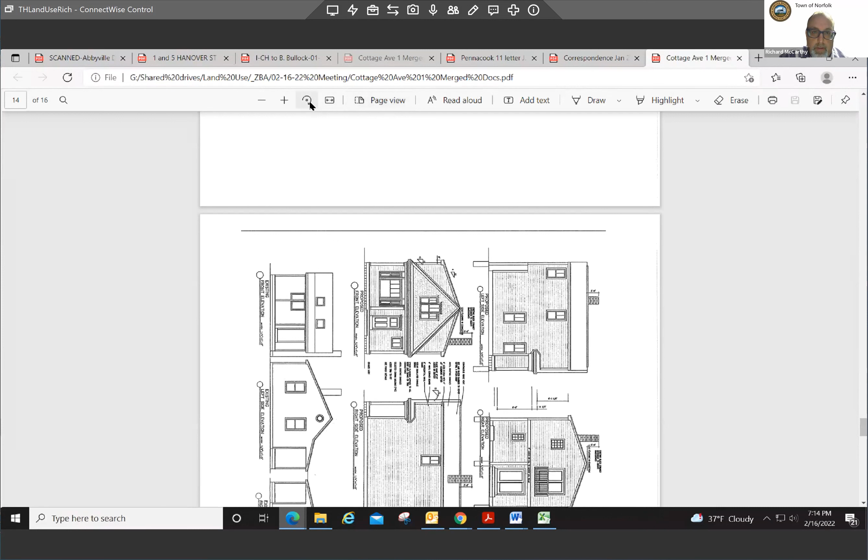So if you want to, Michael, just explain what the request is. Michael, if you could walk us through your application, that would be wonderful. Are you asking me? Yes. I was looking to put, it's a single bedroom cottage. I wanted to put a second floor on to put two bedrooms up so my kids, my family, can possibly come stay with me for a weekend or something of that matter. Make it just a little bit bigger, not much more altering what is there except for going up, I guess.

I have my builder here if you have any questions for the builder. That's gonna kind of make it more, I guess, a comfortable house, it's pretty small right now. If you look at the dimensions, it's pretty small. But that's what I'm looking to accomplish, is get a second bedroom so the kids can come visit and possibly stay for the weekend, something like that. I'm not moving anybody else in or anything like that, it's gonna be just me and the cat.

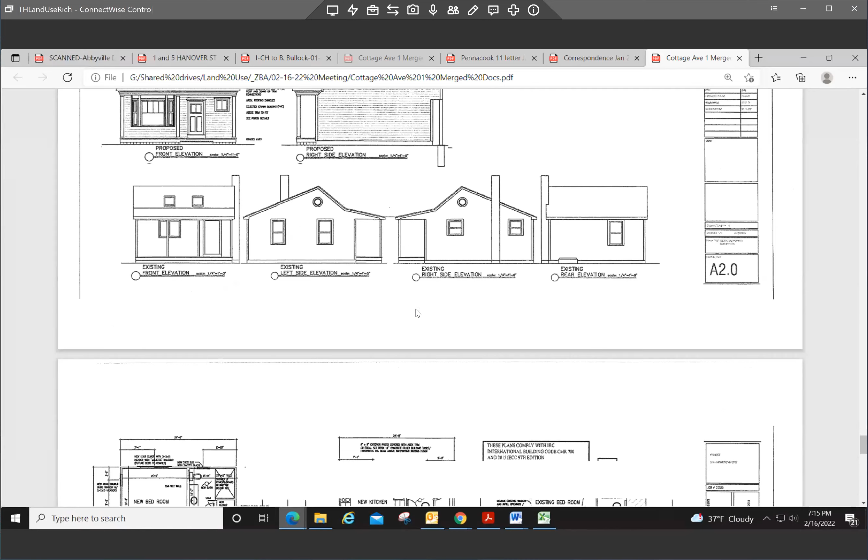It's difficult to hear. So Michael, if you could just help us out, I had difficulty hearing you. Could you just explain the property now? I think it's a small single-family home, and I think you said you want to expand by going up, I just couldn't hear you. I apologize, yes, I'll just talk slowly, maybe I talk too fast.

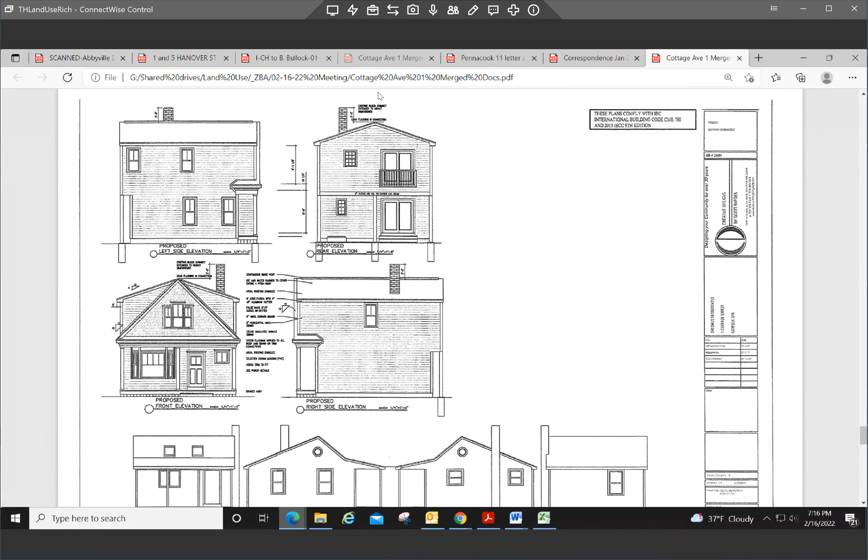It is a one-bedroom, living room, galley kitchen, bathroom house, cottage. It's a small cottage. What I'm looking to do is put a second floor, so a second bedroom, so my children can come over and stay if they want to visit.

So in terms of it's a pre-existing non-conforming structure, he's adding a second story to it, so he needs to come before us for an extension in terms of that as a non-conforming structure to add the second story.

Right, can I ask, Mr. Chairman, go ahead. Joe, second floor addition for another bedroom and any other room? That's a question to the applicant. One bedroom, two bedrooms? There'll be, the bedroom on the first floor will be non-existent anymore, and upstairs will be two bedrooms.

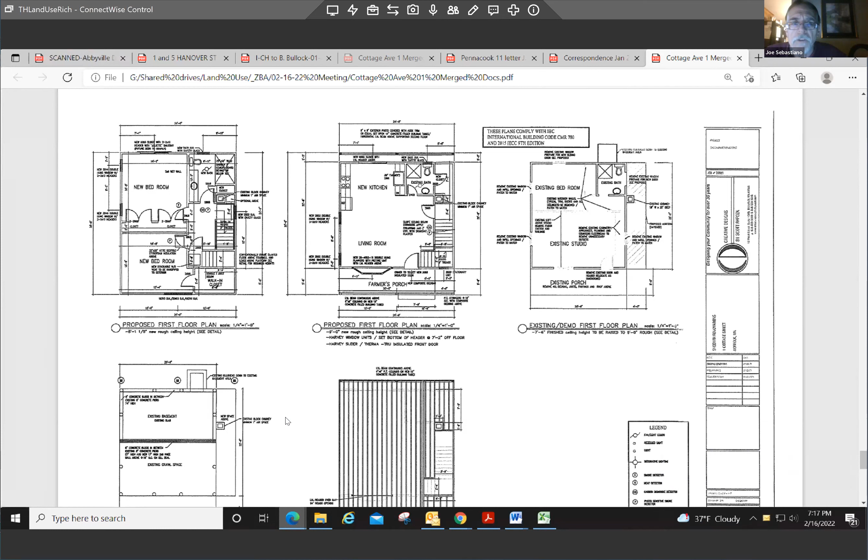Any other additional washroom or anything, or just that? There's a bathroom, right Joe? Yes, there is a bathroom, there's gonna be a bathroom on the second floor. Besides that, there's no more going on besides what I have now. All right, that was my question, Mr. Chairman. Okay, thank you. The Cottage Ave, I know generally where it is in town, but I don't know that I've actually been on Cottage Ave.

Michael, could you help me out a little bit? I know that area a little bit, not as well as I should, but I know some of the streets are paper streets down there. What I'm trying to get at - you kind of go through either Franklin or Medway to get there. Yeah, it overlooks Populatic. It's way up on the top of the hillside. I can see the lake, but I'm on the other side of the street.

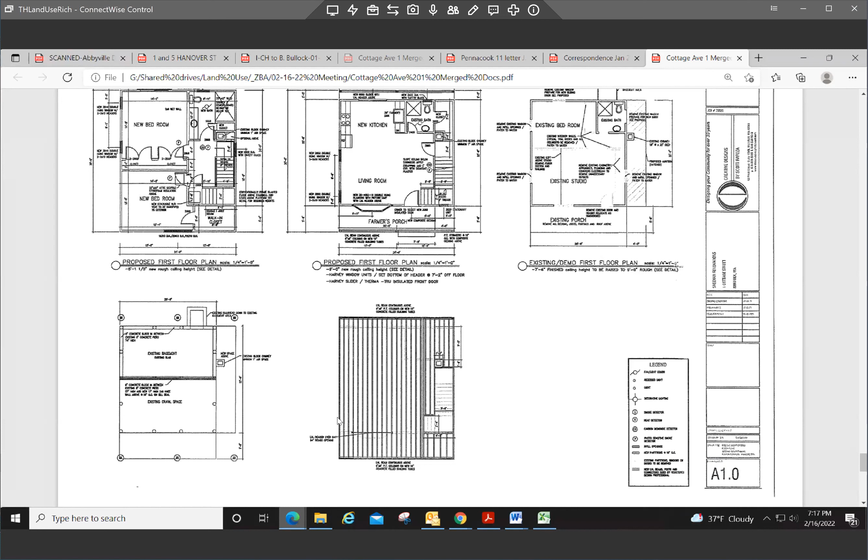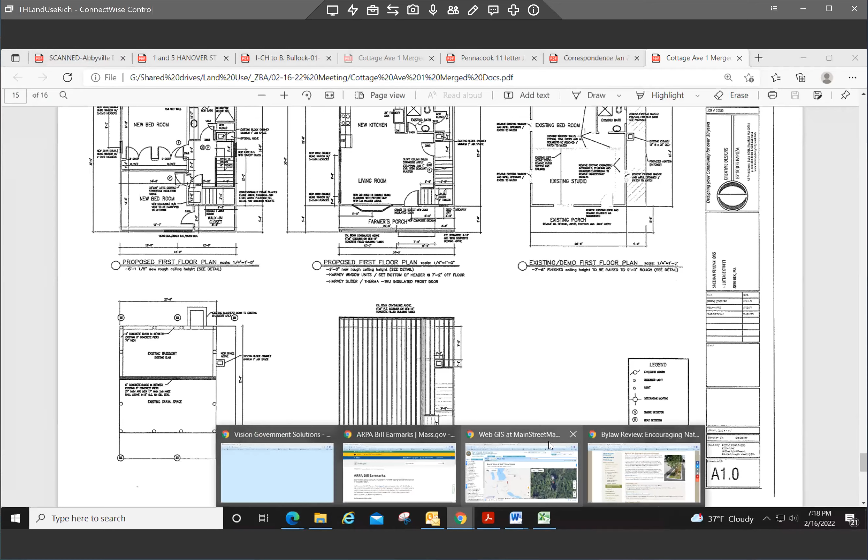Where else had you references? I usually go up by the Norfolk Airport, look around, and head up Leland Street when Leland goes around, and I almost do a U-turn and show up down the dirt road. It looks like - this is Chris Metcalf - it's not far from Old Populatic, which we know about near the lake. It's the higher ground of that, I guess you could say. So I think Rich has helped us with a map or a plan here, showing - maybe we can get a little.

So I should be - if I can read this - like 4-14-25. So is that Norfolk Ave? Is that, Norfolk Ave is the paper road next to me. Okay, so your access is off Cottage Ave. My access, that's my address is considered 1 Cottage Ave, but the paper road is there. So you're basically, from a practical purpose, at a dead end of a way. Yes, because Norfolk Ave does not exist. It's not paved. There's no cut, there's no way to get there. They built other houses. It's just a piece of gravel.

The reason I asked the question - we had, like Chris mentioned, one on Old Populatic, and this may have similar challenges, which I want to avoid relative to emergency vehicle access or neighbors getting out. Maybe your contractor might be available tonight to talk about how this would be done, if all materials and trucks would be located on your property so as not to block any egress or access points on Cottage Ave or any of the other ways.

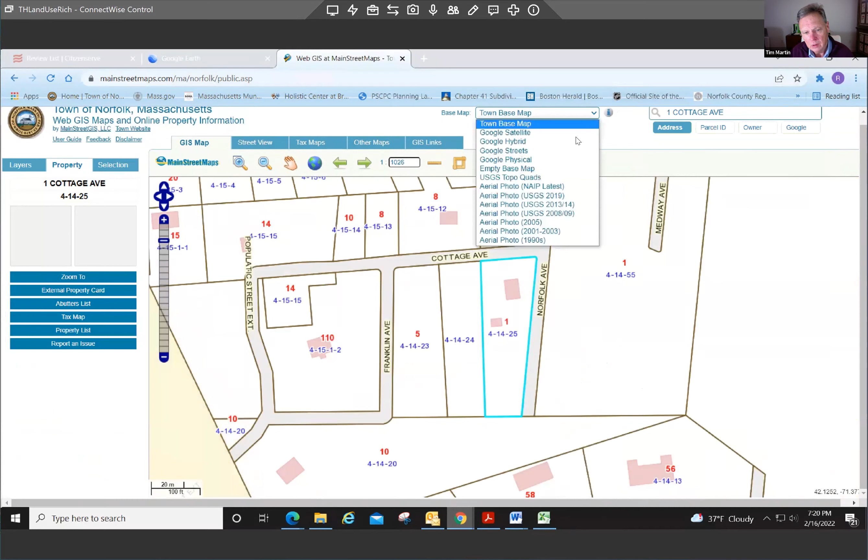It may make sense just because of the uniqueness of that area that, whether the board wants to do this, we may want to, like we did on Old Populatic, as a condition - if we vote favorably - have the applicant contact the town planner's office, or the building department, prior to construction, just so they know work's going on out there or ready to commence in a day or two, in case there is a concern. We tend to be in snow season, even in March and April some years, so it could get tight out there if work were to commence.

I'm very friendly with all my neighbors. I'm sure we all work together - any issues like that, we help each other plow out and all that. I'll make very sure that nobody's in the way.

This is Chris Metcalf. I have one question for Mike. One of the things is, in cases, it's not detrimental to the neighborhood, and I agree with him. But are any of the other houses 2-story, or are they all cottages in that area? No, there are actually - my neighbor across the street, that's 2-story. The Devon's at the end of the road is a 2-story. Actually everyone is a 2-story. I'm the only one that's not.

All right, good question. So it sounds like it'll fit in nice with the neighborhood. Yeah, and I want to make it look better. Again, it just gives me a little bit more for my kids to come enjoy if they choose to.

Great, any other questions from the board? I have a quick question, please. I understand it's an extension of a nonconformity, but what exactly is a nonconformity? It's the setback on the left hand side, right? From two front yards?

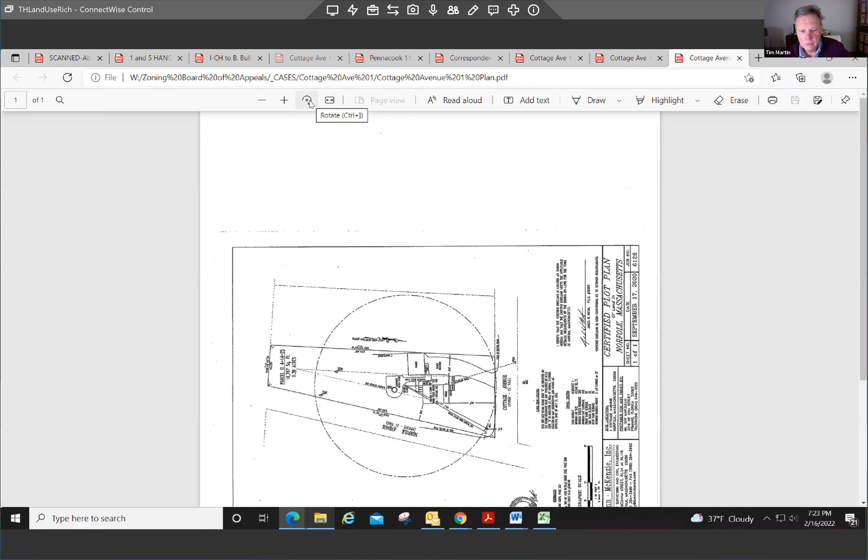I'm just gonna pull up the plan. Mike, I have one other question. In that area, are you guys on Franklin water and sewer, or on Norfolk? Nope, I have a brand new well and septic. So I'm not on any town system of any kind.

Okay, has the additional capacity been put in - do you have capacity for a 2-bedroom? Yeah, the well is way over on everything. No, not the well, your septic system. The septic systems are sized by bedroom?

And so that's outside our purview, but Board of Health, we might as well find out. I believe it is. That'll come up when you go to pull a permit from the building department. Yeah, that'll come up at that time, but you may want to check in. Yeah, you want to find out earlier rather than later.

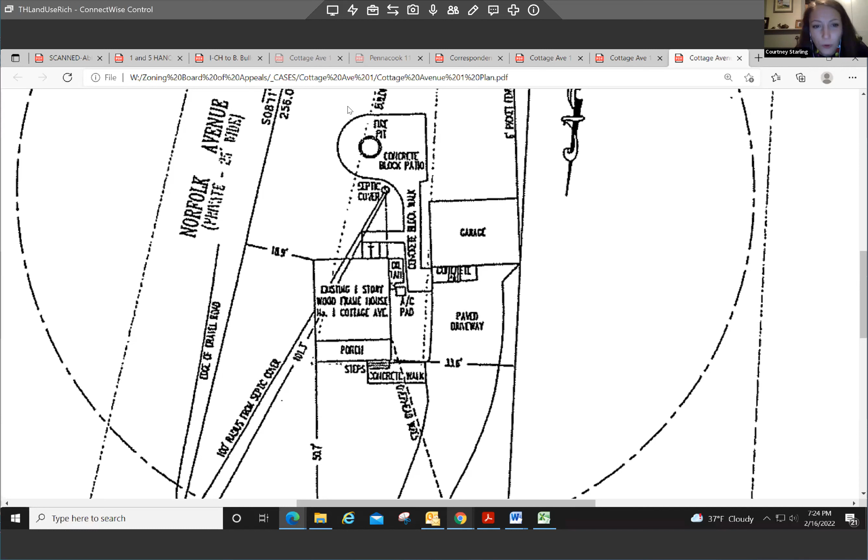So, I can't quite read the number, but I know it's less than 25 feet on the side there. I see 18.5. Okay, and the other one I can't - well, I wish my eyes were better. That looks like the garage is on the property line. Yeah, the garage, the side setback looks like 33 and a half. Yeah, I see 33.5. And then 50.7 on the front.

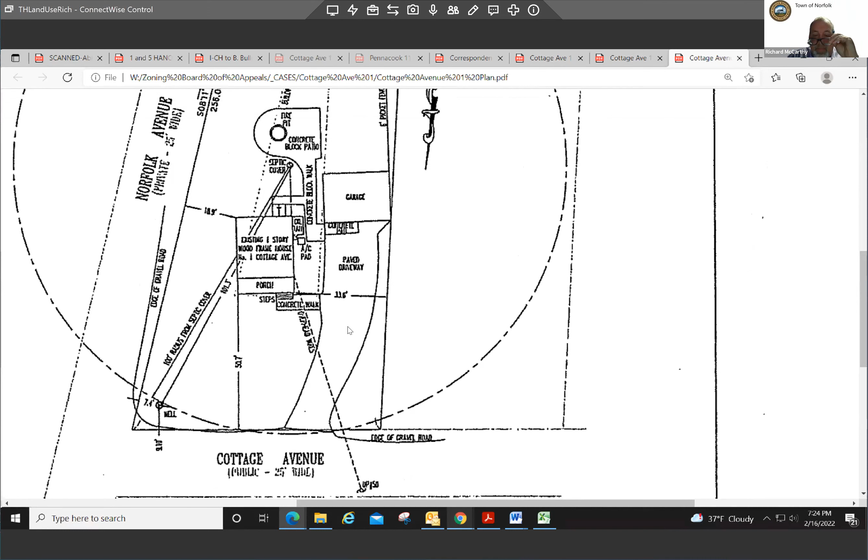Excuse my head, yeah - what's the actual lot size? Hold on... 16,767 square feet. So it's less in terms of overall lot size and the side yard setback. Yeah, I mean, in reality that's probably why it's nonconforming, is all of the above.

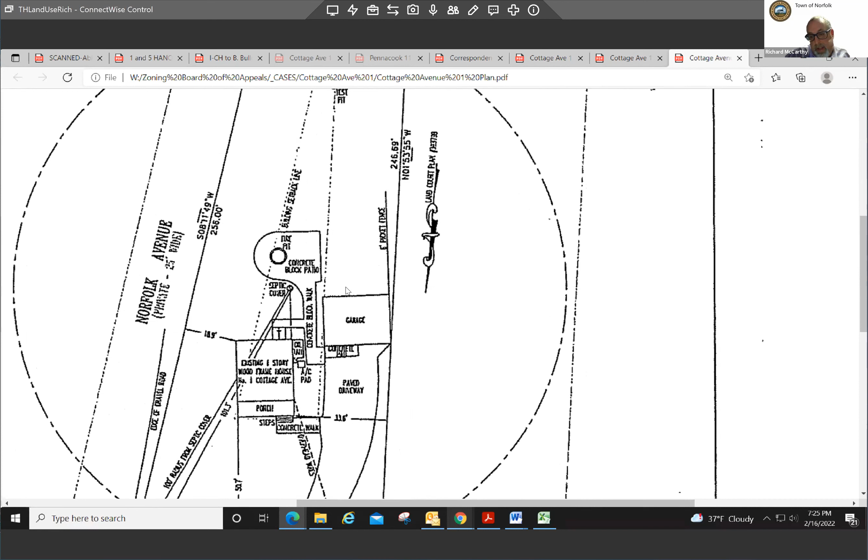Yep. And Rich, this is Joe - do you have all the dimensions you need for documenting the nonconformity? Yeah, no, I have the dimensions, I just can't - I apologize, my poor eyesight - be able to read it, that's all.

Yeah, sometimes it's summarized on the application what the setbacks need to be and what they are. You know what, let me double check - if I don't have it, I can get them though. I'm looking at the application I have a copy of, but I don't have that exact plot plan. I have the drawings of the additional room though, the additional floor.

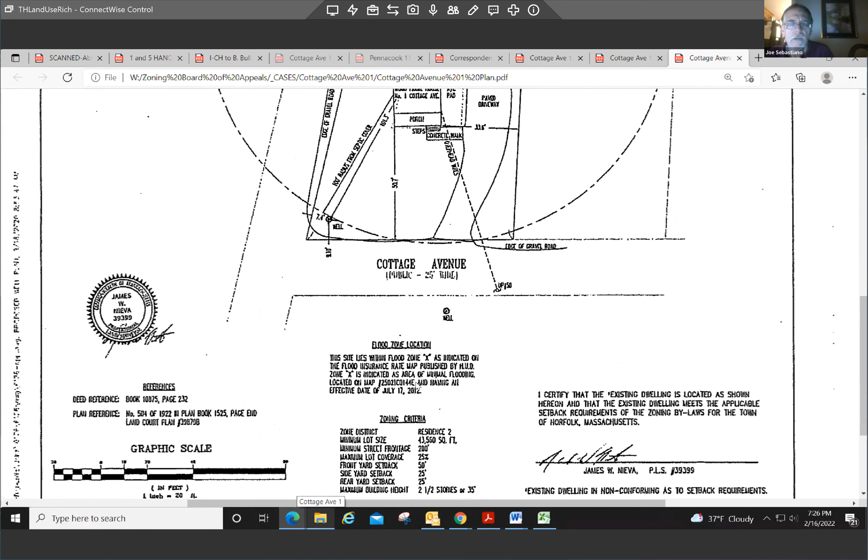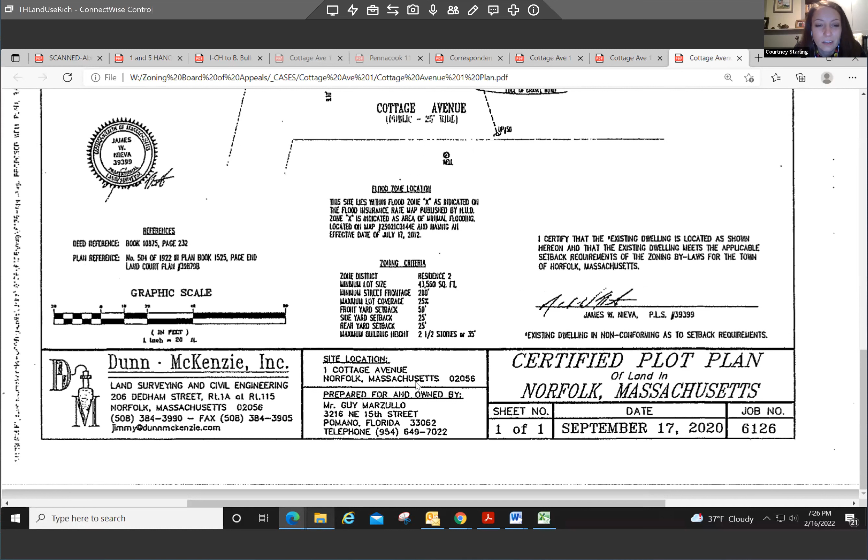Oh, there's the zoning analysis. Oh, but it's only what's required, not the existing. If I can get a better plan from Dunn McKenzie, I also could ask them to clarify. We can pretty clearly see the minimum lot size is deficient and the side yard setback marked 18.5 is the deficiency.

That's not - my eyes aren't that bad. My name is Joe Durb, I'm the contractor. We had Dunn McKenzie draw the plans for the project.

So they've got full-size plans - we have full-size plans we could submit to you guys. Yeah, oh sure, yeah definitely. The scan's just a little hard to see.

And I've walked the plan through the building department already, and pretty much around the town just to get a feel of everything, if it was worth trying to go for, and they said they didn't think it was going to be a problem, kind of thing.

So Joe, you'd be comfortable if there was a condition on the special permit that you reach out to the town prior to starting construction, just because of the uniqueness of that area? Yeah, no, I'll be honest with you, I do a lot of work in Newton, so I know how to play the game and keep everybody happy.

We send letters out to abutting neighbors just to make sure everybody's got our numbers. That's great, I just want to avoid any issues with emergency vehicle access or anybody else needing access.

Like Mike said, there's a paper road on the side. When you go to his property, it just looks like his yard, there's nothing there. So the lot looks small, but it's really not.

So you think without bothering anybody on the street, there's room for supplies and trucks on the property during construction, other than delivery coming in and out? I'll be honest, the picture doesn't do it justice. If you go up there and see, there's plenty of room, and it won't impede any of the other neighbors.

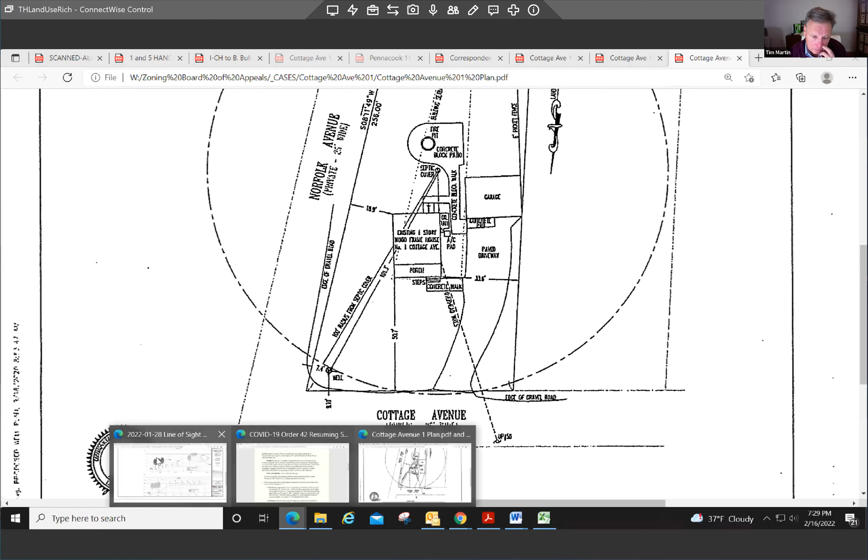And the applicant is very amenable if we put a condition on the special permit that they would reach out to the town planner and/or the building department prior to construction, just to have a construction meeting for access issues. It's really not as difficult a site as Old Populatic, I don't believe, but it's probably still a tight site, just trying to keep everybody having access out there.

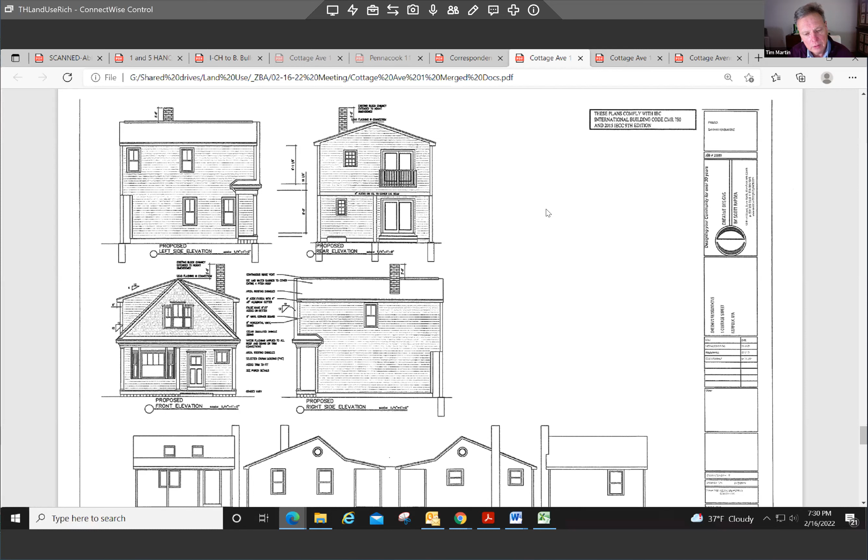That's all. And I did want to ask, I was here for most of it, just missed the last few minutes. I did want to ask, how much access does he have for parking, the applicant?

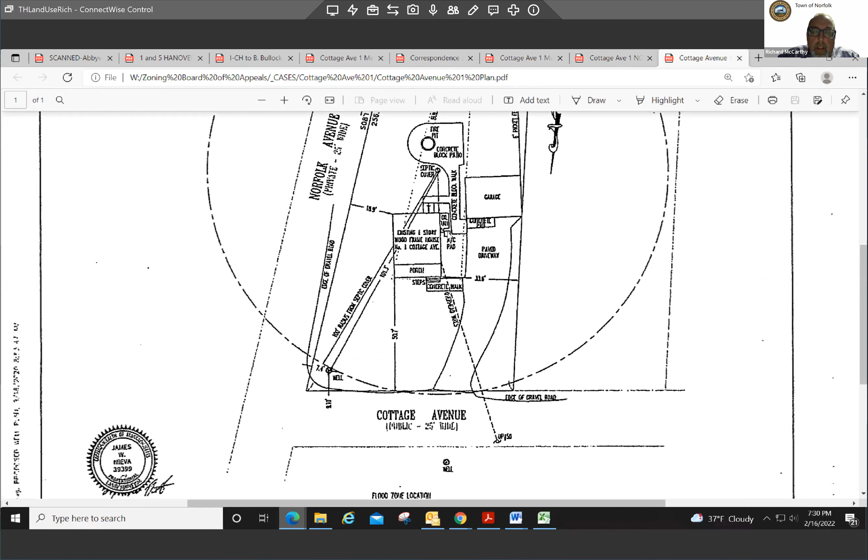Well, if you want to pull up that site plan, we can take a look at that. I think, well, maybe Mike could go through it. I can, just let me go there. Why don't we look at this? This will help a little bit, Josephine.

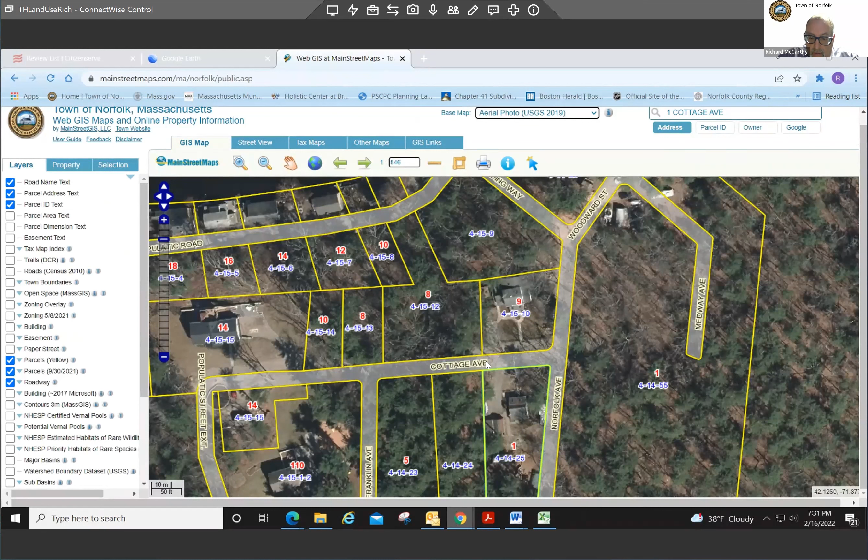So what's highlighted in green is One Cottage Ave. And then over here to the right-hand side of the screen, Norfolk Ave is a paper street, so it doesn't exist in terms of on the ground. The neighbor across the street - so what they're saying is that there's room on the ground, which I can't zoom in too far, but you can see there's room to be able to park construction vehicles and keep the driveway on the other side and this driveway clear.

Okay, yeah. And I guess I remember the applicant saying that they're going to look into whether their septic can handle another bedroom. I'm not sure they confirmed that, but that would be part of the building permit process. Dunfelt McKenzie will be involved in that. Oh yes, I'm familiar with them. So it's just one more bedroom you're adding, sir? Yeah, okay.

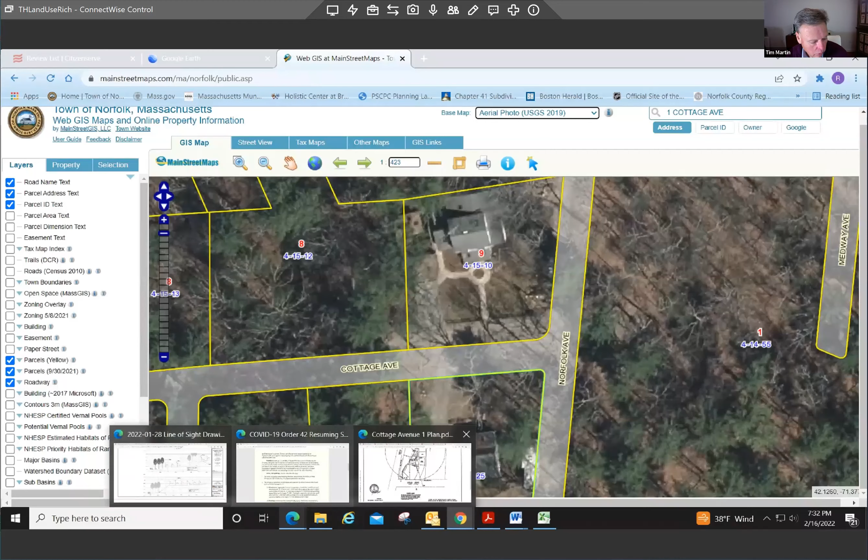Any other questions from the board? Is there anybody else from the board? Anybody from the public, Elaine or Rich? Anybody out there? I'm not seeing anyone.

Anything else from the applicant or the builder? No, I think we're all set. We'll do whatever you guys want. If you want, we'll send in a letter saying that we will contact the building department before any big steps are made as we go along.

That may be on the special permit, so I'd probably anticipate that. You're welcome to watch the meeting and we'll close. I intend to close the hearing if no one else has anything. And if we can tonight, we'll take the time, we'll deliberate and vote, and then have a decision maybe at the next meeting or earlier. We'll see how that plays out. Thank you very much.

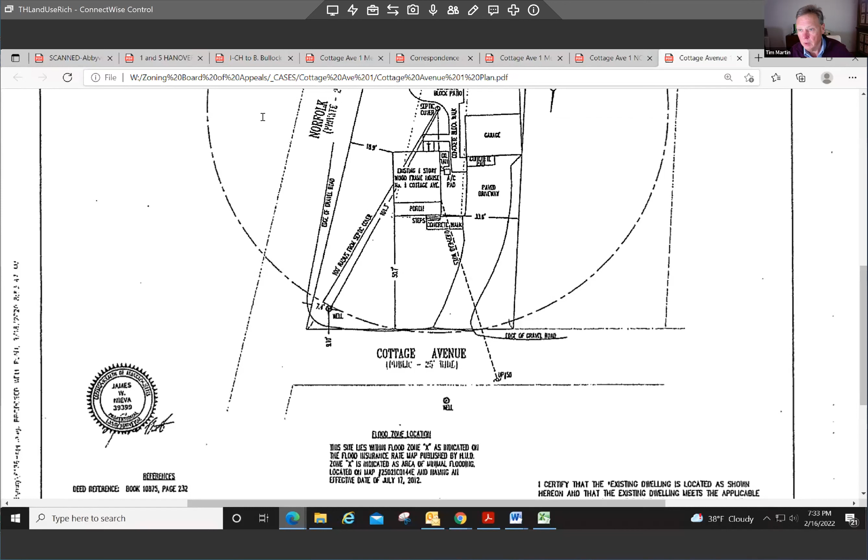So can we get a motion to close the public hearing? I'll make a motion to close the public hearing for One Cottage Ave for the alteration or enlargement of the existing non-conforming structure, such as map 4, block 14, lot 25 in the R2 zoning district.

Is there a second to that motion? I second the motion. David Axberg seconds that motion. Is there any further discussion from the board or from the public? There being none, we'll need a roll call vote.

Elaine, if you could help us out. Chris Metcalf, aye. Josephine Kordahi, aye. David Axberg, aye. Timothy Martin, aye. Joe Sebastiano, aye. Thank you very much.

Next on the agenda, it's 7:34. Next on the agenda, continued from December I believe, we have 90 through 100 Pond Street and Sharon Ave, special permit for a large scale ground photovoltaic solar system. Is the applicant present?

We have the applicant. Welcome. Hi, thank you. My name is Daniel Server. I'm the Director of Development with Next Grid Inc. I'm here with Brian, civil engineer with BSC Group.

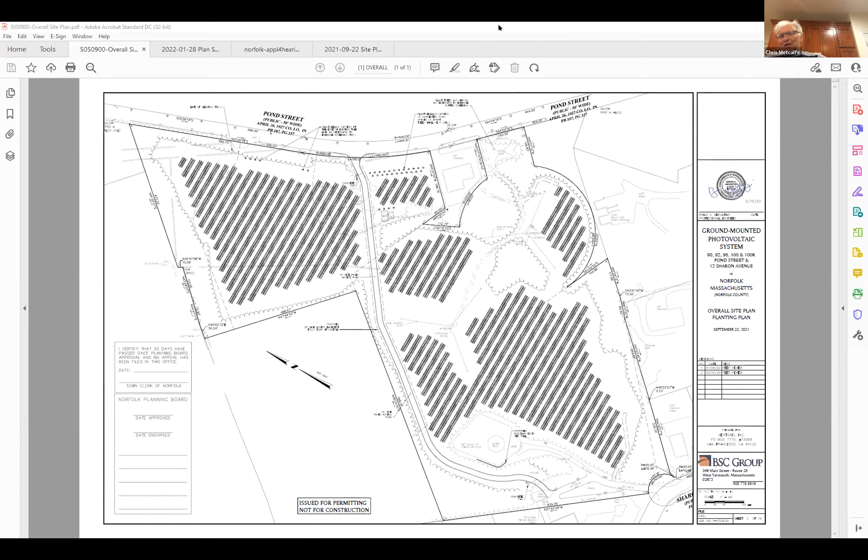So I think, Chris, we kind of left you out, you had some questions I believe. I'll join in a little bit here. I got a couple of questions for Brian. I know he's the civil engineer, but is there any concern about the configuration of the PV cells and the performance? Because usually the PV cells are grouped in sections so you can get the right voltages, and with this site configuration it looks very complicated. So are you using this site because it's giving you good performance, or because that's what you were given?

That's a great question, Chris. I'm going to let Daniel speak to that. And the reason I'm saying that, my background is from Westinghouse Electric, so I have a PhD in engineering, and I know from a PV performance standpoint it's complicated, you've got sections in different locations which will get different sunlight, and it's going to be a very complicated wiring system.

Daniel, are you still on? I know he had another hearing tonight. Okay, well let's go to the other question then. I apologize, Chris, we will get you an answer to that though.

The other question I have is related to the road. It looks awfully close to the PV cells, and if you're going to have a heavy snow load, someone's going to push a load of snow into your PV cells, they're very vulnerable. There's actually more space than it looks like, because the plan I most recently had up was 1 inch to 60 feet. So there's like 1 or 2 cells which are about 5-6 feet from the road, but otherwise they're set back further than that.

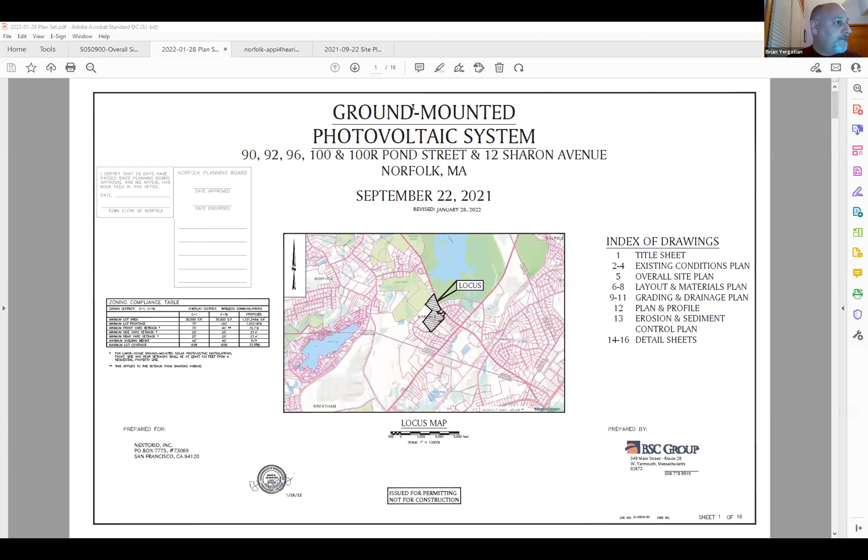Let me share the screen again and go to... okay, let me zoom in a little bit, it's hard to see the scale.

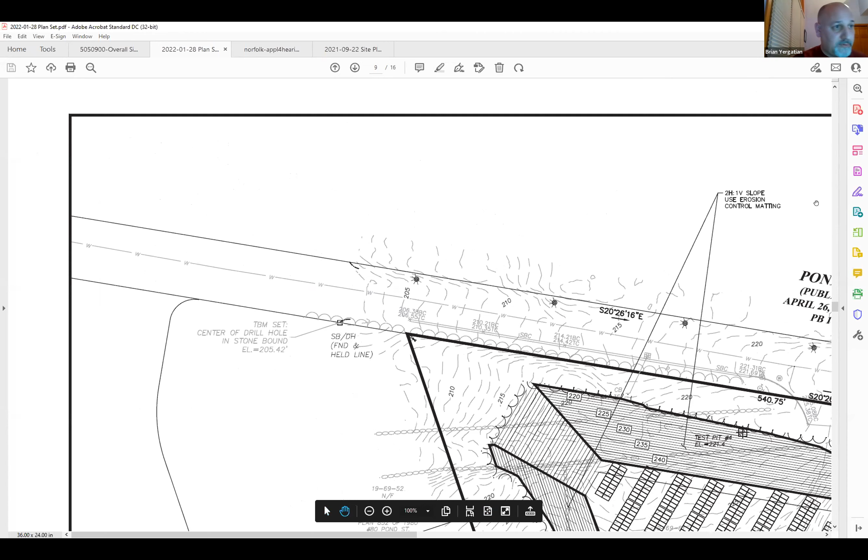So this is Pond Street. Here's our proposed utility poles. We'll have overhead step down process, recloser poles, utility poles, metering poles. Then the three battery storage equipment pads are located right here.

So where is the inverter system? Is that after the batteries? That's right here on these pads. Daniel could speak better to that than me, but I guess technically that would be where the interconnection is.

So the grid system has enough capacity to take the 4 megawatts in the cabling? I'm assuming so, they have their interconnection already, but that's above my pay grade, Chris.

Yeah, because this is a distributed power system, basically you're going to provide power locally.

Daniel is back. Chris, if you want to ask Daniel your question. Go right ahead, Chris. Hey Dan, well I had two questions.

One was the site configuration with the panels, the way they laid out. It's obviously a pretty complicated wiring system to get the correct voltage out of the whole system to get to the batteries. Was that driven by the site location? Is there a better configuration that you would prefer?

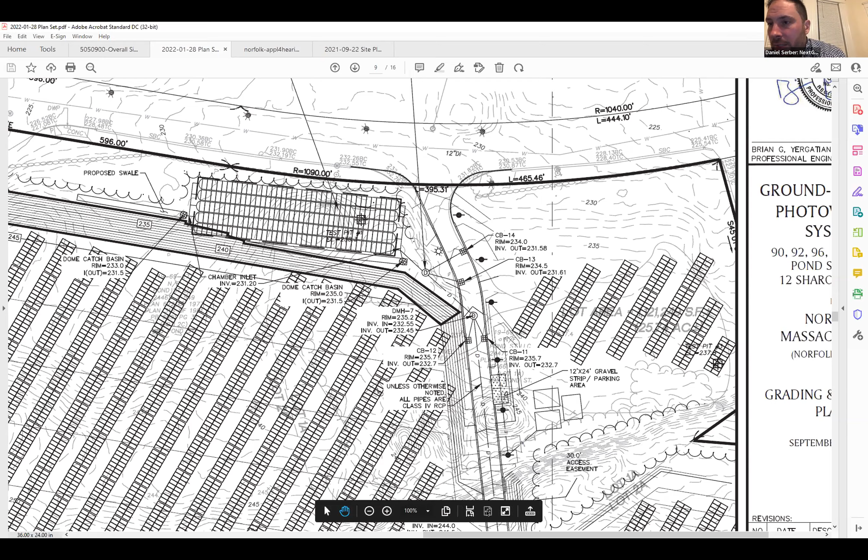Well, the site's complicated for a few reasons. First of all, we're dealing with the shortwave radio tower, and it has anchor poles, and those anchor poles need to be adjusted occasionally, so we have to have a wide breadth around those. Further, we're working around some topography, and also around other people's land setbacks, stuff like that. So we don't find it to be particularly complicated.

We do underground wiring that connects into the reclosers, like Brian says, and the central inverters, and it just feeds up into the system. Solar is very forgiving with the design, so it doesn't necessarily make it more complicated.

Yeah Tim, there's some really bad feedback, but yes, there is actually the plan, I sent it over to Rich late this afternoon. It wasn't a landscape plan per se, typical landscape plan. It's an overall site plan, and it has the proposed landscaping features shown on it.

I'm having some troubles with the screen share. Is it the plan that you think the planning board had asked for? Is that what is to address their concerns? Honestly, it was what I could get done between the planning board and today to try and address it as quickly as I could, Tim. It wasn't what I would say a final landscape plan.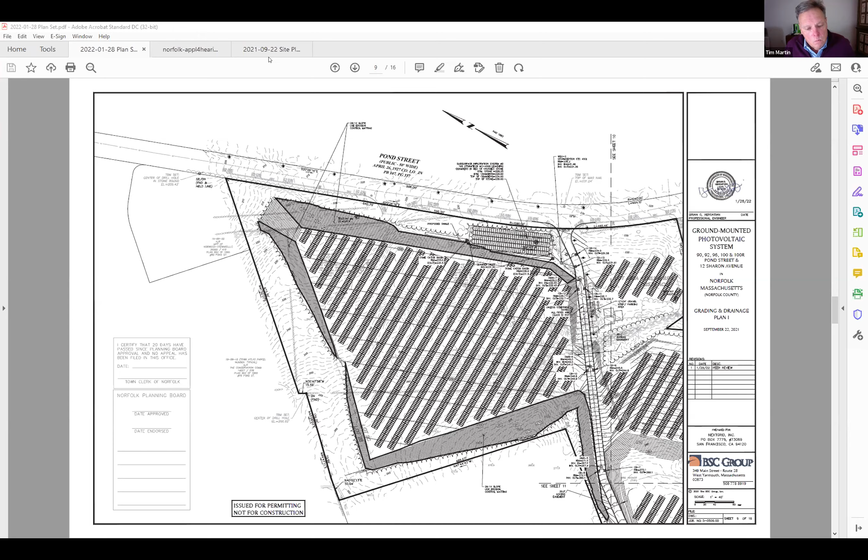Tim, I'll just say this again, we just need to allow this via the fact that it's the photovoltaic system that's allowable by our bylaws, and that's what we're issuing a special permit for, correct?

I'm wondering if Joe's calling in - it's not working. We can't hear him. Can't hear you, Joe, am I muted? No, it's breaking up. Am I buffering, Joe? You might consider hanging up and calling back in. I don't think that's the issue, I think it might be bandwidth. We need to keep our cameras on, but if he turns his off, we might get better audio. That's better, Joe, go ahead, we can hear you now. Is that any better? Can you hear me? Yes, that's better, okay.

I was just saying that in the end, what we're doing here is we're going to issue a special permit under the bylaw. We just need to agree that it's allowable by the bylaw and issue a special permit, and that the planning board's points are accepted. That's all we're doing here, correct? Correct, you're going to get a special permit for the use.

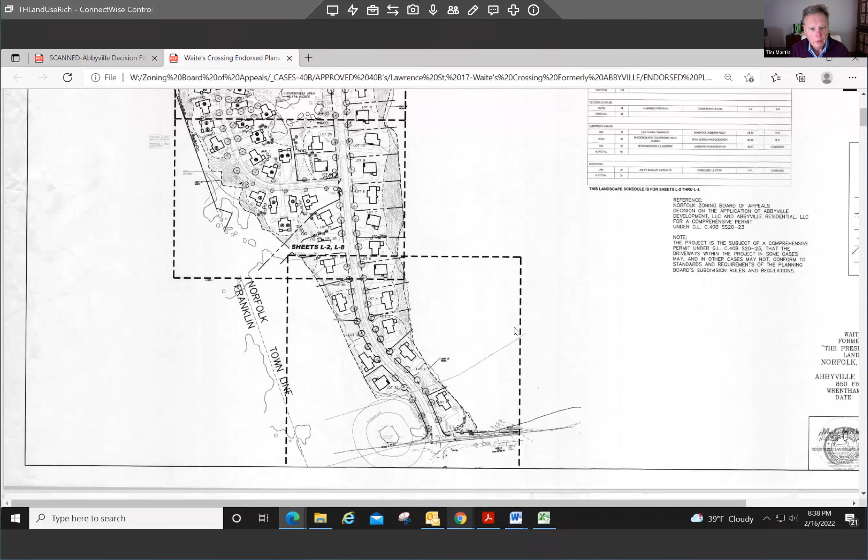That's great. So I think from a practical standpoint, tell me if I'm wrong - if you go out, start marketing, and folks are coming in and they'd like to pick a location and maybe tweak a design, and you'd like to accommodate them. But right now you're tied up a little bit because the permit might be restrictive, and you have to come back to us, and you spend a month, and you can't get back to the homeowner, and it's kind of frustrating that way.

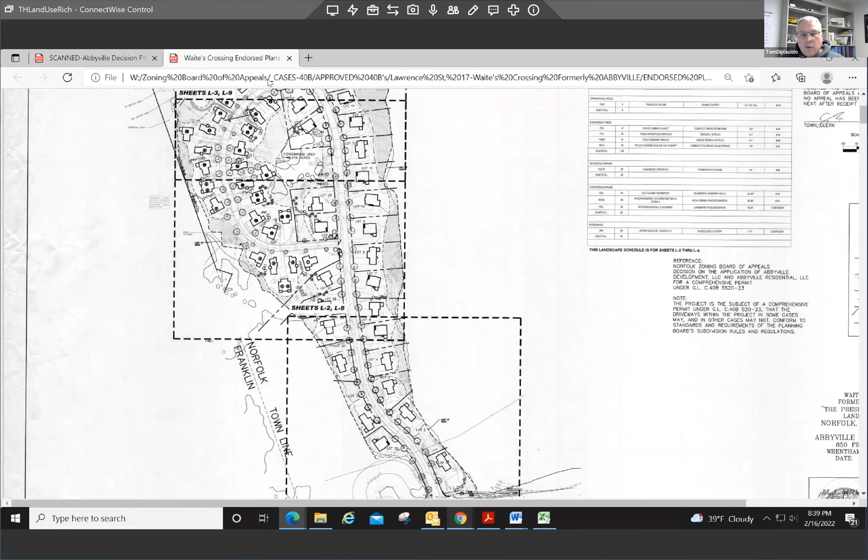So you're really looking for a little more leeway on the design - you're not changing the number of units, you're not changing roadways or anything like that. You're just looking to tweak the actual unit to accommodate what your homeowner is looking for. Is that accurate? That's correct. With that, it's just not really specified that we could do something like this in the comprehensive permit. We just want to make sure that we could, and that's what we're asking for this modification for.

Otherwise, we could potentially come in here 64 times asking for different relief - changing windows or architectural elements that wouldn't even be thought of if you were building in another development. It's all adding value to the neighborhood with this. So that really takes some of the burden off the ZBA from us coming back and forth all the time.

And with this, we're not asking for any relief from setbacks or anything else. All that would stay the same. So the conditions of the comprehensive permit, if it's a 20-foot setback for instance, we're not encroaching on that. There's nothing that would impact that. So we'd stay with the same type of look and feel that the ZBA originally approved. We're just looking at trying to enhance the appearance of the houses.

How do you intend to accommodate that in the affordable units? They have to be built to the same design standard. So if the options are available, we know that the purchase price is obviously capped on the affordable units. How do we ensure that farmer's porches, upgraded windows and things of the like ensure that the units cannot be identified from the exterior as affordable units? How do you intend to ensure that will happen?

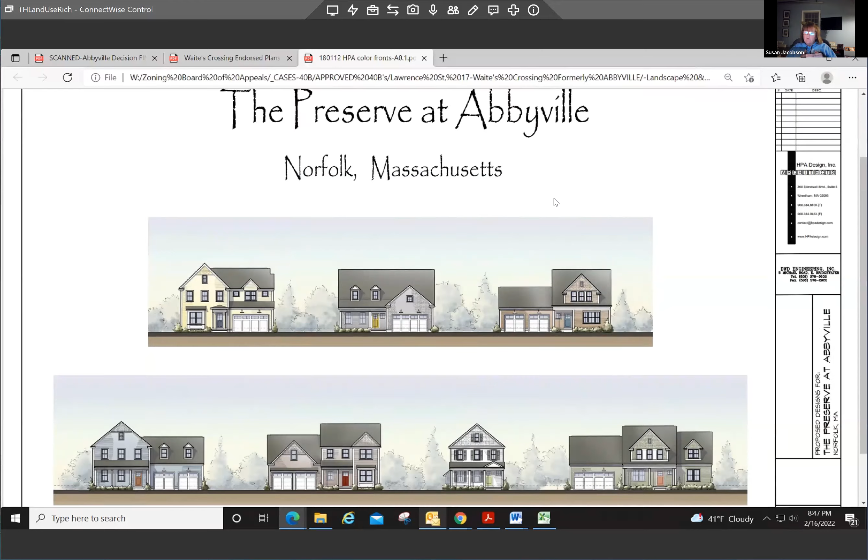To Tom's point, if a market rate buyer says they'd like a dormer or a farmer's porch, that's an upgrade and an expense to them. For an affordable buyer it works the same way—if upgrades are allowed, and they're not always allowed, and an affordable buyer wants to put on a screened porch, that cost goes to the affordable buyer. So if upgrades are allowed, the cost is still borne by the buyer. I understand what Courtney's saying—she doesn't want to see 16 homes with porches and 2 with none—but we need to be clear that the cost is borne by the buyer, whether affordable or market rate.

I didn't know the answer, but without knowing it I suspected that's the answer, because it wouldn't be logical otherwise—you couldn't monitor everything down to a dollar amount. Every time you change one exterior molding, you'd have to send people out to examine the cost and recalibrate the whole thing. It's just not practical, so I didn't expect the answer to be different. I just wanted to ask how the state looked at it, because sometimes their rules and regs don't make a lot of sense to me. But I know that's shocking. In any event, Courtney raises a valid concern—we don't want it to look like the affordable units are clearly inferior, but the base model is the base model.

So I guess I'd ask Tom what exactly kind of language he's looking for from us to amend the decision—what specifically are you looking for, Tom?

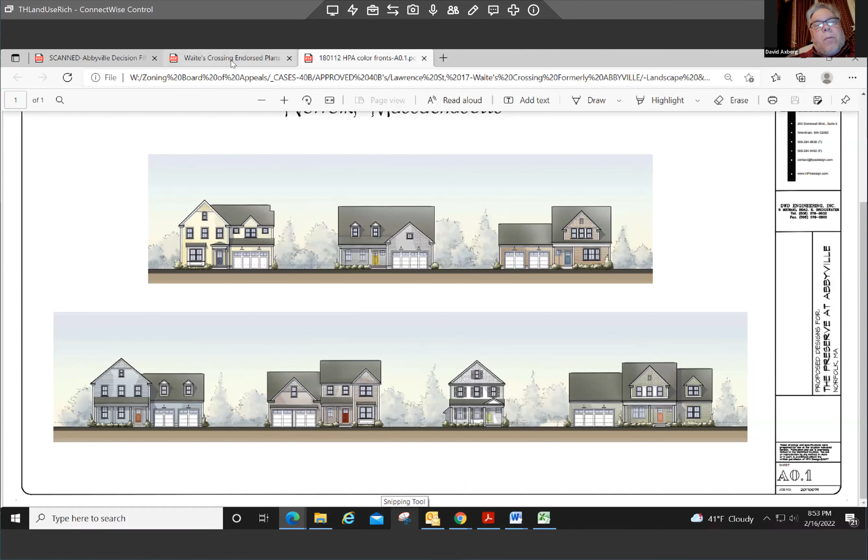And if somebody buying a new home from a developer, they might want to change this, that, or the other thing, maybe put a little porch on the back, a farmer's porch on the front, maybe even a third car garage. Looking at those elevations, all the garage doors are in the front. There's some opportunity at some of these locations to maybe put a side car entrance, put windows in the front.

Yeah, makes sense. I go strictly by those, and it's strictly adhered to on the comprehensive permit. I've got to build them just like that. I can't put a side entry garage or a farmer's porch across and just try to break up the neighborhood a little bit, that's all.

I think the only thing that makes any difference is if square footage is added. Outside of that, you're not talking about major exterior alterations or anything like that. It's just when square footage is added that things change a little.

Yeah, he's asking for opportunity for upgrades. I hate to say, hey, no, we don't want upgrades in Norfolk. No, not at all. My only concern, to be honest, when I look at the front here, it's the smallest house that I see getting two shed dormers on either side, and to me that's a significant change, but it's not really.

I guess I don't care. No, and you make valid points. You boil it down - you don't want one house to stand out as an affordable house for whatever reason, but on the same token, we want to encourage upgrades. No, we want that, right?

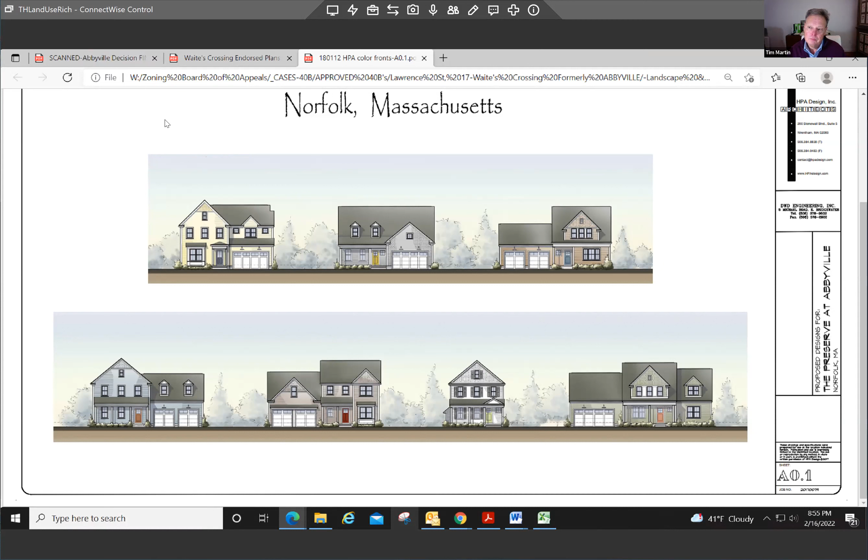My point is not about standing out. My point is really just making sure that the affordable units are designed and constructed at the expense of the developer to a similar standard as the rest of the neighborhood. And where I care about square footage is just where it comes down to whether or not the units being sold are comparable, that's all.

I get it, it's just anal retentive about it. No, it's wonderful, Courtney, it's wonderful to have somebody that's in tune with that.

But just for the board's information, I am the lottery agent for this project, so it's an in-house lottery agent, which is terrific because it gives you a little bit of kind... yeah.

The monitoring agent I'm working with is one I have worked with on two other projects. The more you work with a monitoring agent, the better your procedures get, and there's less room for error. You know what the expectations are. We work as a team, and we're both responsible to answer to Mass Housing.

What we don't want is, Courtney's exactly right, we don't want there to be a 1,500 square foot house and have it be the only 1,500 square foot house in a development of 32 homes, so people can drive in and select which are the affordable and which aren't.

I think the size of this is great for us to get 8 units, because I'm not sure how many on this board were aware, but we actually did our first payment in lieu of program because we had somebody building a 14 unit subdivision, before our bylaws were higher numbers, and they were building 4,000 square foot homes. We did not want to put an affordable buyer in a 4,000 square foot home, one affordable buyer in a neighborhood of 14 homes that are all on the market, many sold for between $800,000 and $1 million. So it's a balancing act.

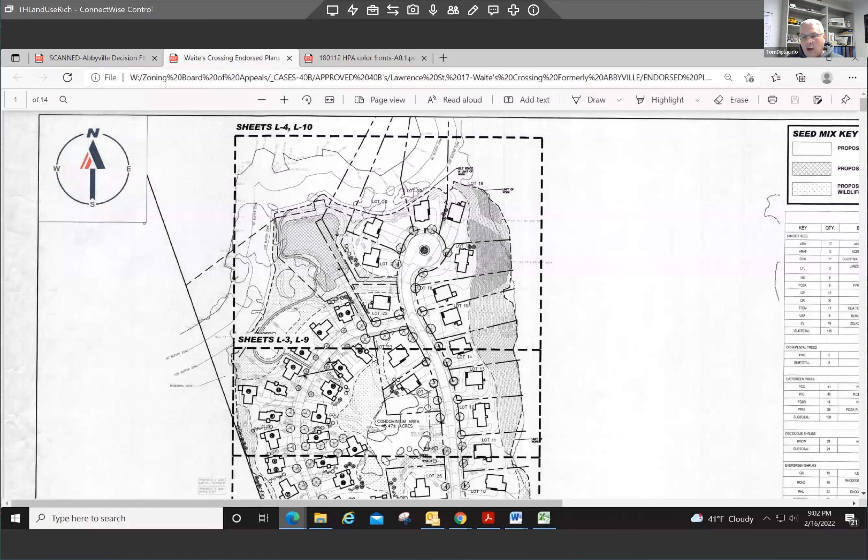Well, so we know that if we vote, Mr. Diplacido is comfortable with it also. Right, because I think the site plan at the moment, Tom, has probably got your best guess of what each location would have built on it, right? It does - it shows basically what we think is our best guess, what fits most appropriately on each lot. I don't see it varying significantly from what we've shown as footprints, but there could be some variations there.

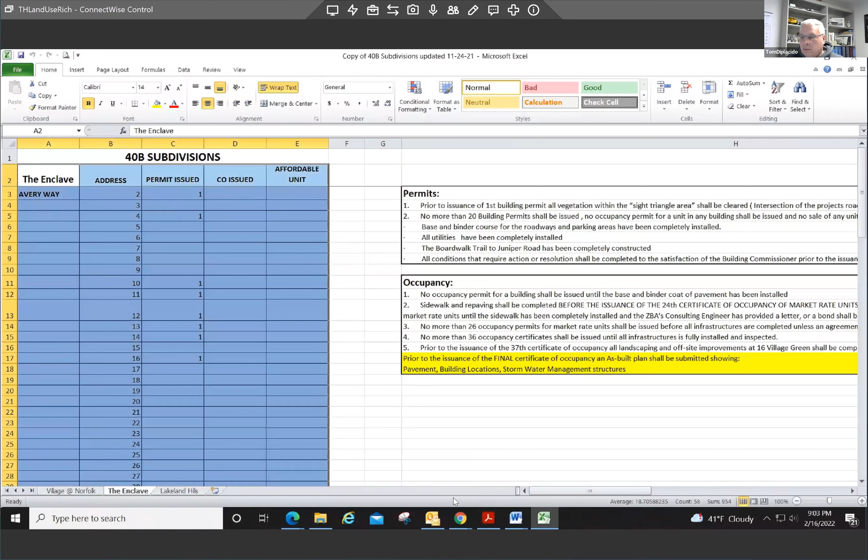And you don't want to come back to the board each time you want to make that change - it's really your direction. Yeah, so you also need some looseness with respect to the elevations that were approved with the base models, not just the site plan. I assume the elevations were part of your whole review and you'd want to reflect that reference too.

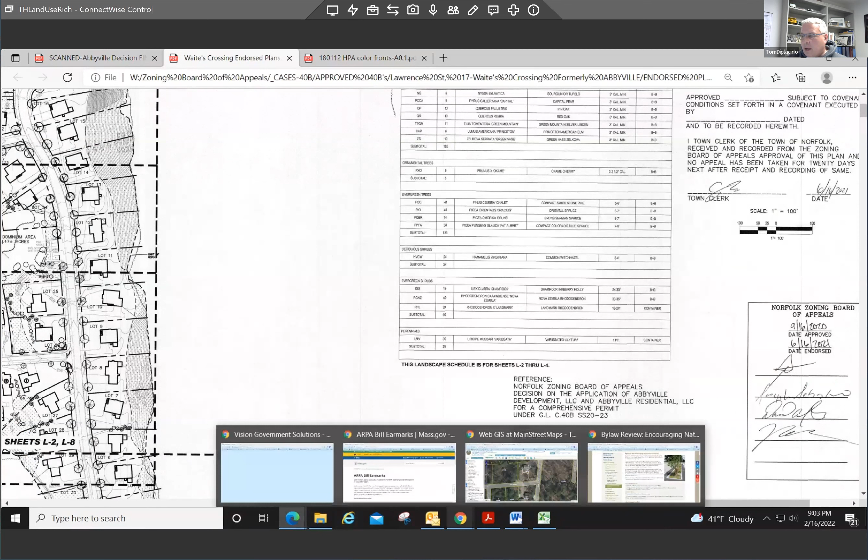If you'd be so kind, Rich - I sent a copy of the approved and recorded comprehensive permit in that email I sent to you, just so I could show you this. I had a feeling this question would come up.

Yeah, and because if they were just models, I don't know that you even need anything extra - it would seem you'd already have the flexibility, because the site plan was just footprints too, not final building locations. I'm going to grab the decision - so this is just belt and suspenders. If we have the decision there, let's look at A10.

Okay yeah, that's a long detailed list of proposed elevations that I already saw. Sorry, yeah, we're past it - yeah, I can see what you've got in here. All right, so it sort of gives everything - right, so that was a pretty specific plan set. So you need flexibility to modify the proposed floor plans and elevations in addition to the site plan. Correct.

Suspect you should get both. Fit it all on the screen there - there it is. What you're on right now, page 5, it's actually section 411 and section 412. And then if you go to section A10, which I'm asking for the modification on, it defines those two sections combined collectively as the site plans, and that's why I use that term. If there's a better way to do it, I'm more than open to listening to other options.

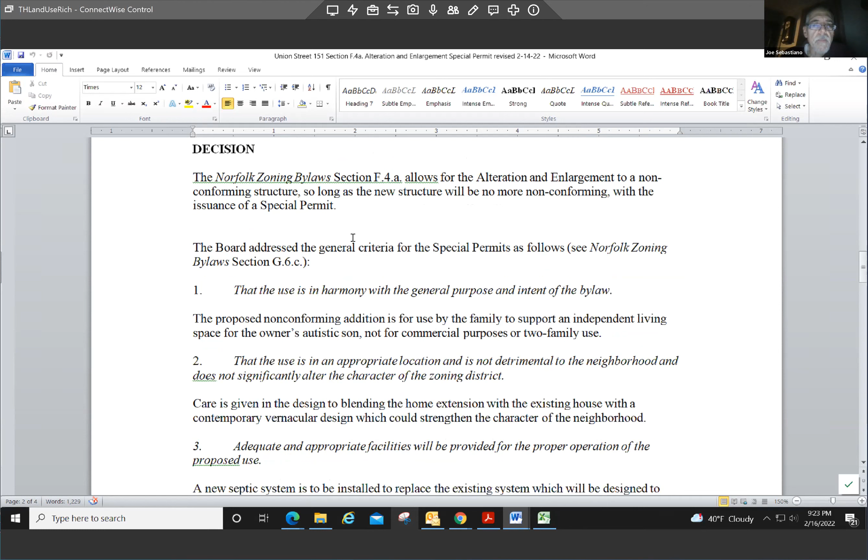Not quite. I assume so, yes. Is there any discussion on this? I thought it looked good, Tim - this is Joe. Okay, are there any other comments or questions on this? No.

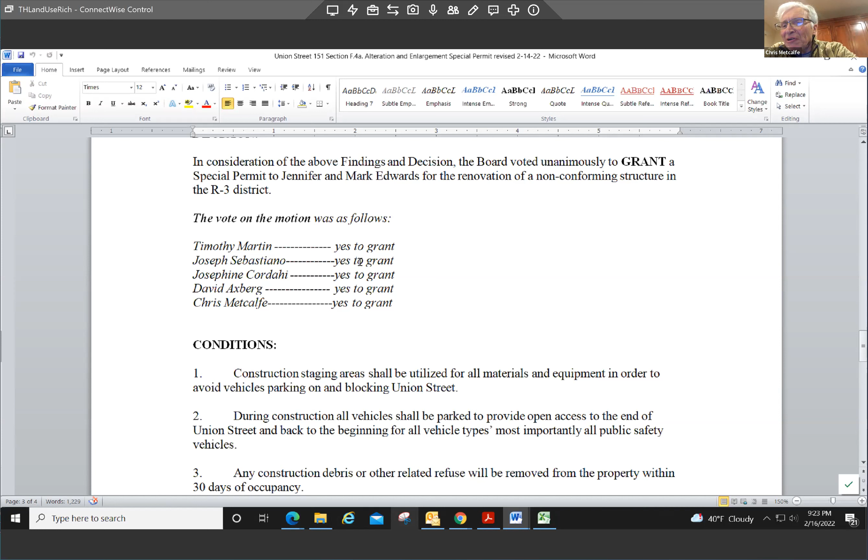Everyone's familiar with the plan that was presented? If not, we could put it up again just to refresh your memory. Yeah, this is Chris Metcalfe. The only question I have is one I've had before, which is this - the master plan going back to 2007.

We have, within the town of Norfolk, residential zones that allow single family homes. So Rich, do you just want to scroll down? That's good, want to scroll down so we can see the conditions?

I don't think there was really anything else in this particular that jumped out. It's a pretty big property, quite a bit of space, even in terms of their driveway to do the construction. Yeah, there's a lot of acreage there. Yeah, so I didn't really see too much more that jumps out, unless the board does.

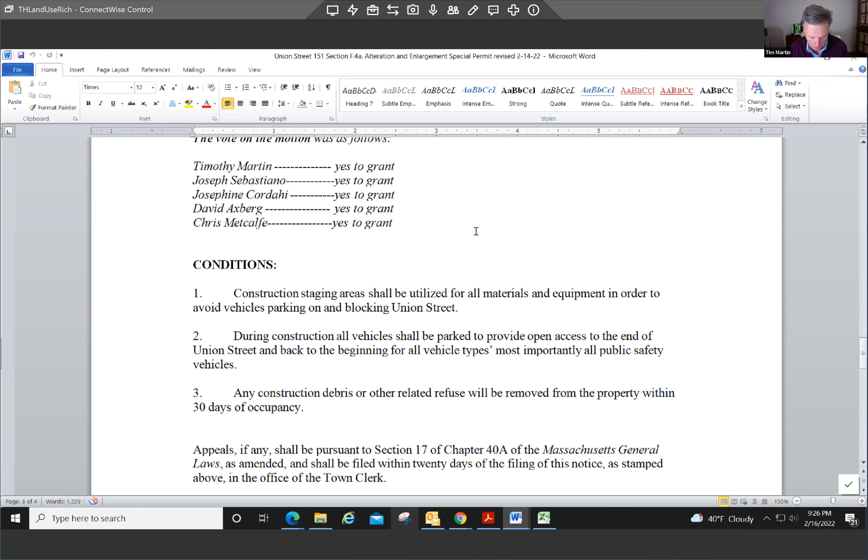I don't know of anything else out there. Rich or Elaine, am I missing something? Do we need to discuss the other hearing we had tonight, or wait till the decision is written? The Cottage Ave one? I propose doing it the same way we're doing this one, if you don't mind.

I mean, draft it and you can take a stab at it. Why don't we do that first, and then I'll have it for the next meeting. Are there any decisions, because we're all in the meeting now, is there anything at the office that we should come down to sign?

Elaine, is there anything open that we need to sign or take a look at? No, it'll just be this one here, Union Street, and the minutes too. Joe, if you could come sign them.

Yeah, I'll come down, I'll try and get down by Friday. Not Friday, I'll try and get down tomorrow lunchtime. You around? All right, I'll be there. When would this be available for Union Street? I'm not sure, there's any edits. Tomorrow, tomorrow morning.

Tomorrow's Thursday, so if you can get there Thursday, that would help out the applicant. Monday's a holiday. Everyone can do their best effort. I intend to get there later in the day, but if everybody could just do their best.